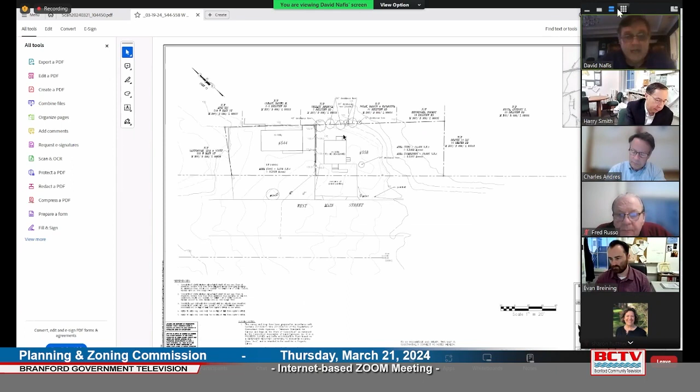Over the past couple weeks, we had some developments, but maybe I can refresh a little on what's going on. We have the site with the existing building here. This building is going to remain and become the auto repair shop. This existing house is going to be razed right here—it's going to be gone, and it's going to become part of what will now be the parking area for the cars required for the site.

And then we're going to have extra parking in this area for what they consider car storage for cars to be sold.

What we've done from last time—there was a comment about drainage—so we've added some more infiltrators in this area. The roof leaders are going to feed down into the infiltration system, with an overflow at the roof leader in this area. This will keep our peak runoff rates within the site boundaries at pre-existing conditions. There is a slight increase of impervious area on site, which is where the infiltration system is.

In addition, the area outside that's still part of the project was not included in that calculation, and what we've done there is actually reduce impervious surface. So we have a net reduction of 2,100 square feet. This was paved pretty much from here all the way across with either gravel or bituminous, and you can see now we've added a lot of grass space in between.

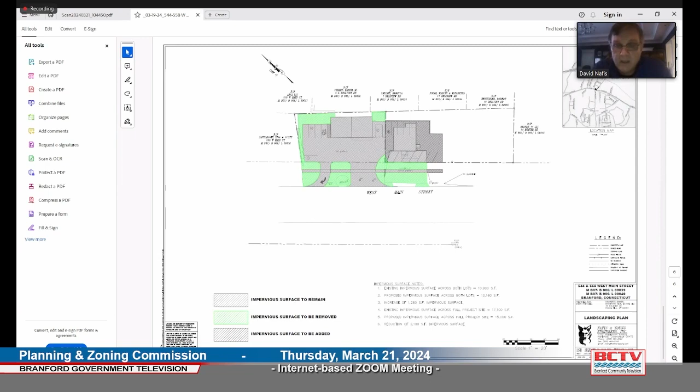Over the last two weeks, we've met with the landscape architect, Mr. Lawrence Appleton, and he basically gave us what he deemed we should do on the site. Let me see if I can pull this up.

So what he's looking for us to do is we've pulled the fence in on this side. There's a screen fence here, and we're removing some asphalt. We're going to mulch the area in the back here—this area will become a mulch bed. These are the existing large trees along the back line.

So what he suggested we do too is pull this fence up to here. We're going to put in a retaining wall, so there'll just be some minor grading to fill in here, but there won't really be grading in the back of this area. So we should be able to preserve all these trees.

We've also added a small swale in this area with these trees, as he suggested, so any sheet runoff in the parking lot will go here, and all these trees in this area will absorb that extra water before it goes downhill to the large wetland down here.

Where we show the silt fence here is basically where the top of the slope is—from here it really starts to drop off. So we're going to try to catch everything here where it's a little flatter, before it has a chance to run off and go down the hill.

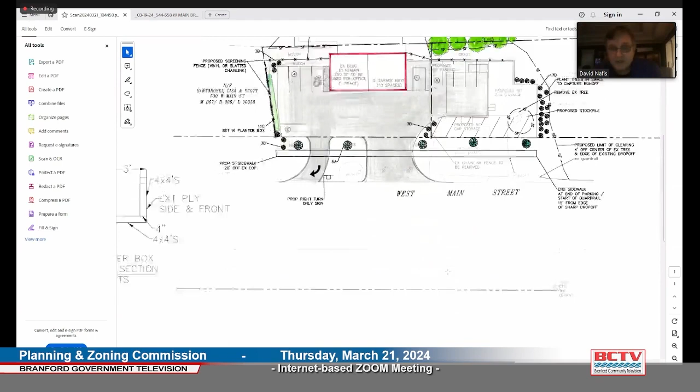You can see we added a couple little trees around the whole site. The type of trees is listed on the bottom of the sheet, and you can go through each one. I'm not necessarily a big tree guy, so I can't give you all the ins and outs of what does what, but I do know the ones over here he said were very good at absorbing water.

And this light green patch over here is a planter box that will be set with a bunch of plantings too, to screen off the area where even though it's a house, it's still in the business zone. Other than that, that's pretty much the changes we've made over the last couple weeks.

Okay, Chair, thank you, Mr. Nafis. Anything else? From our end, that's pretty much it. Okay.

We'll turn this over to Evan. Evan, I think you've been reviewing this application. Do you have comments? Have you had a chance to review these, or where are we? I did not have the opportunity to revise my staff report. Received the plans yesterday. I believe there was also a stormwater report given to the town engineer, so he is yet to make a review or provide any comment. I'd like to continue to the next meeting so I can prepare a response to the submitted plans.

Thank you, Evan. I would like to hear what the commission thinks. We had a discussion at the last meeting about the landscaping plan, so I'd like to see if these measures taken are something they're comfortable with.

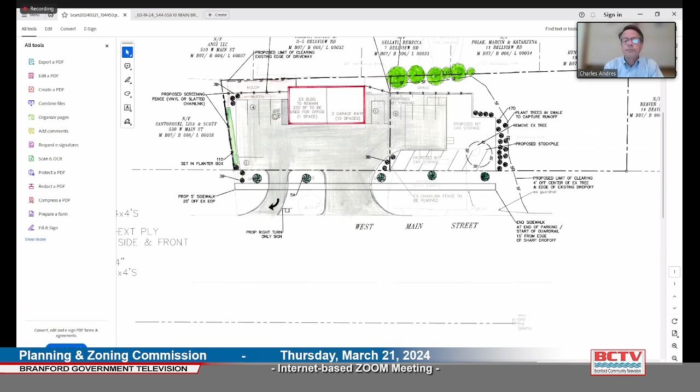Dave Nafis, I could just add one thing. Mr. Appleton actually drew these out. We just added them to our plans. So this was his actual layout. Okay, great. Thank you, Mr. Nafis.

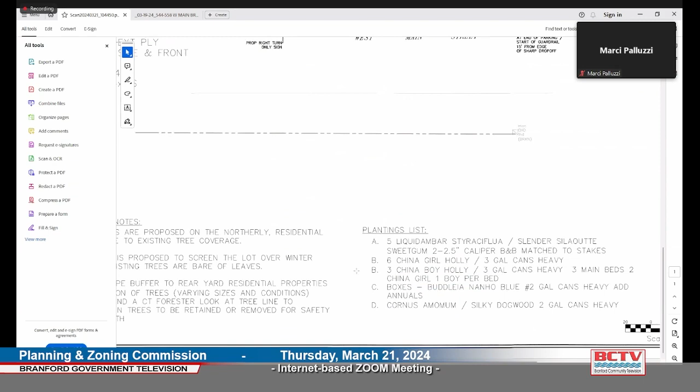Questions, comments from commission members? Hi, could you just zoom in on the plant list again, please? It's Marci. Thank you, it looks much better. Thank you, Marci.

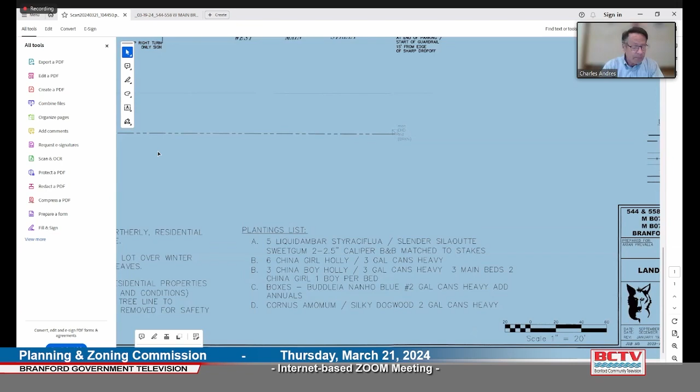Any other comments, Marci? Any other thoughts you'd like to make at this time? Other than my dog barking in the background, no. That looks like he's got some natives in there. He's got some good plants. The dogwoods will do well in the swale, so I trust his years of experience. I'm happy to see that they're protecting the trees with the retaining wall. I think that's much improved.

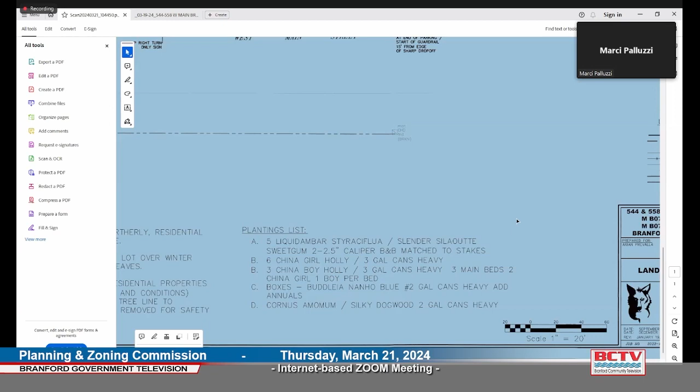Other comments from commission members? Yes, contrary to my flip response, we discussed this previously. I think the scheme has benefited greatly from probably not much effort on the part of the landscape architect, and the overall benefit, I think, will far outweigh any expenditure to provide it. Thank you, Joe.

Other comments from commission members? Sharon Hudner here. I would like to agree with everybody, and I think this just goes to show you how important it is to have a landscape architect look at our plans and make sure that they do have adequate landscaping. So I would like to thank the applicant for moving forward and doing that. Thank you, Sharon.

Other comments from commission members? Fred Russo? I just want to say I think that this plan is significantly better than the one that was previously proposed, and I agree with all the other commissioners who feel that with a little more expertise to the plan, it's going to enhance the property and probably enhance his business. It's going to be more appealing, have better curb appeal. Just seeing what I see here now, I'm happy to see they took all of our advice, which was go back to the drawing table and come back with something better than what you had. I think they've done that. So I'm happy with what I see. Thank you, Fred.

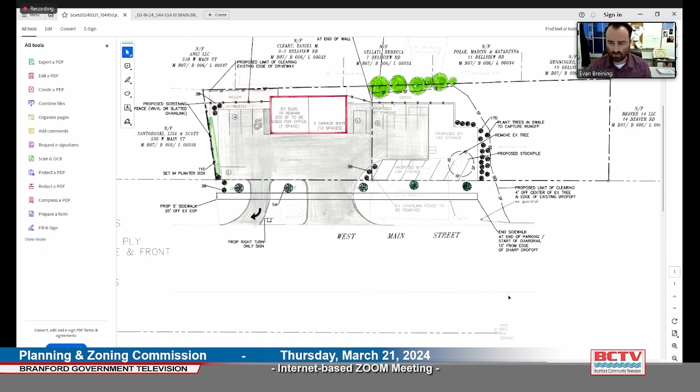Any other questions or comments from any members of commission or staff? Evan, let me ask you, are there other questions you had? I know there were a number of concerns besides the landscaping. Is there anything you wanted to call out? I still have a number of items from my previous staff report. I'll have to skim through them and take a look. I can't think of them off the top of my head, but one thing I didn't see on the grading plan was this proposed swale. Was that on the grading plan, Dave?

I have to take a look... it's gonna be very small, such a small area it may not even show up.

Mr. Appleton asked us just to put a small swale to catch water, and whatever trees we plant along there can absorb a lot of that water before it has a chance to run down the hill into the wetlands. As for the wall height, we've actually reduced it in this area where we've cut the wall, and it's going to get cut here and match. So this section will be a little higher, and as you come around it'll be lower. The total height of the wall is about 2 to 2.5 feet at the maximum, in the back.

Chuck Andres, Chair: Any other questions or comments from commission members before we open it up to the public? Hearing none, let's open it up to the public.

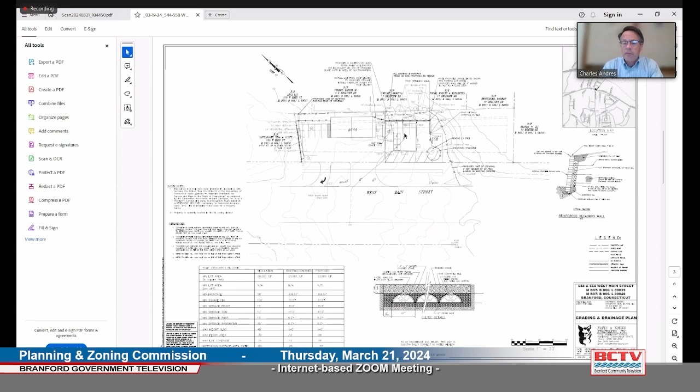Looks like Perry Maresca would like to speak. Mr. Maresca? Whoops, looks like you're muted, Perry. I just asked him to unmute, hopefully. Okay, there you are. Perry Maresca, Economic and Business Development Manager for the town of Branford.

I do think this is a good proposal, especially now that the landscape architect has put in the most recent plans. The fact that they're eliminating some of the paved area, giving more of a buffer from Route 1 into the facility, is great. I think it's a huge improvement to what the property looks like right now. I congratulate the owners for making this effort, and hope that planning and zoning can find a way to approve this.

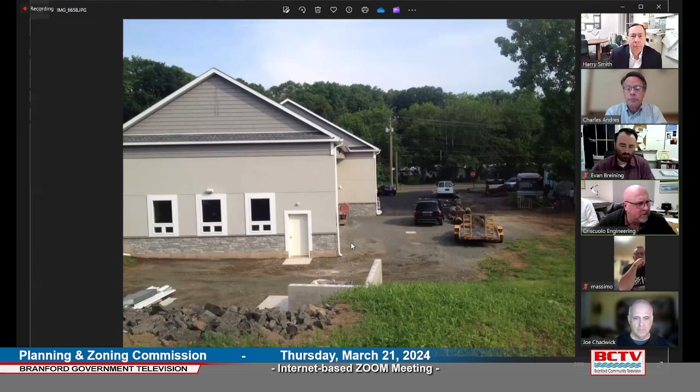This is what the building looked like previously. You can see this is the J&E Auto Body currently, but you could see some of there was a junk bus there. There's J&E Auto Body, and this is the welding shop from the other side.

They have recently cleaned the building up and reskinned it basically, replacing doors and windows. You can see it's a much nicer looking building, very similar to the auto body shop next door, with the same stucco feature and stone coursing, and some shingles in the gable ends.

We did go to the town center review. They were very happy about the appearance of the building matching the other building. So why we're here is that they want to use the building

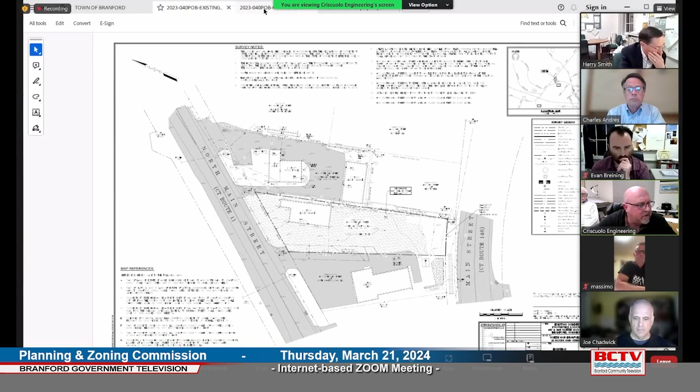as auxiliary space for the auto body shop next door. So we were asked to provide a possible parking and lighting plan. We did have a lighting plan done that was sent in. We show more than enough parking spaces here.

Basically, the parking spaces would be more or less stacking spaces for cars that are either in process of being fixed or to be fixed.

We also have a landscaping plan that Mr. Appleton has helped us prepare. We are providing building plantings along the side here. There is an overhead door in the front, so we're trying to keep this space clear here.

Although historically the old property had basically crushed stone right out to the curb line, that's obviously DOT property within the right of way. So we're taking back all the gravel and stone that's out in the right of way, and putting in topsoil and grass.

We're providing a landscape buffer area along the residential district, which comes through at an odd shape here. And we're adding some street trees along the front, and a street tree in the back.

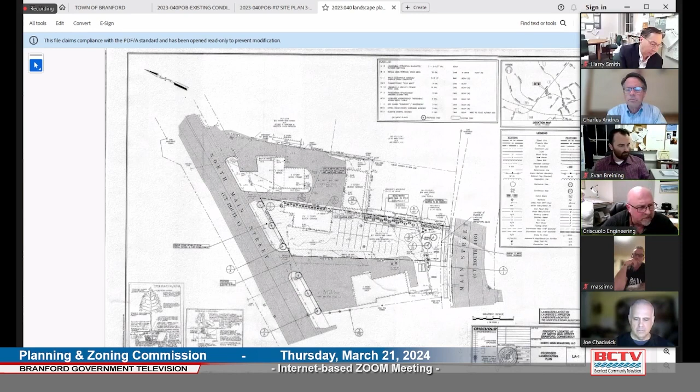We're trying to get them to be able to use that building. But we are talking about adding on to the existing shop, and at that point we will have to merge the lots because of the setback requirements with that lot line. So we'll need to get rid of that lot line, and the next phase would be merging the lots. Adding on at that point, we'll most likely be looking at paving some, if not most, of this. But right now it's going to stay crushed stone.

Thank you, Mr. Preddy. Mr. Immuno is also on here if you have any additional questions that I can't answer.

Chuck: Thank you, Mr. Preddy. Evan, you prepared the staff report for this one? Evan: I did. I think Mr. Preddy hit a lot of the points that were in my staff report already. They're establishing motor vehicle service at a site between two adjacent lots that they previously own and operate their business out of - 13 North Main Street and 23 North Main Street.

It came to our attention late last week that some work had been done at the site. We received some calls from neighbors and other departments with the town of Branford that some paving had been done and a retaining wall had been built.

The applicant's engineer supplied us with a landscaping plan and a new site plan yesterday, so I had recommended in my staff report that we continue to the next meeting. I would still recommend that - I'd just like a chance to look everything over and prepare some conditions of approval, hopefully for our next meeting.

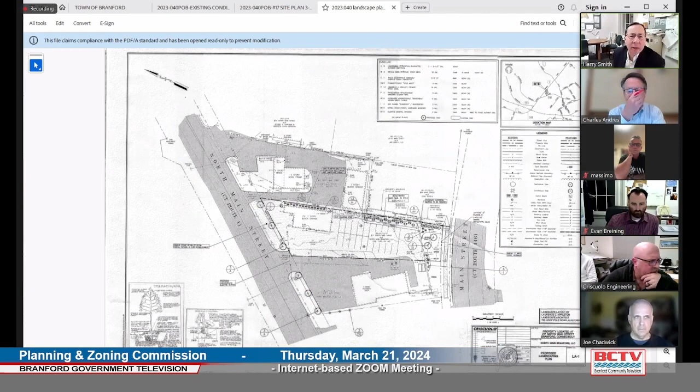Jim Preddy: the street trees, is that what you're talking about? Yeah, the street trees, and there's some shrubs too. So we are proposing some street trees right up against the property line, and then the landscaping on the north side will wrap around the front somewhat.

But we're trying to keep this area open because they'll have to get in and out. The other thing would be to provide access across to the other site without having to go onto Route 1. They're losing a curb cut here, so.

Yeah, I understand, we'll have to. You're at the whim of DOT when you put them in. Apparently, that's my understanding anyway, they can take them down if they need to. Not that they're probably going to, but do you get permission to put them in there? I would think you do. It'll have to get reviewed by them at some point. All right, well, we can look at that before the next meeting.

Jim, how tall is the retaining wall in the back? It is nowhere higher than 3 feet. After we heard about it, I actually sent my survey crew out there and shot it, and it's 2.8 feet here, 2.8 feet in the middle, and it goes down to just over 16 inches at the end. So it's nowhere higher than 3 feet.

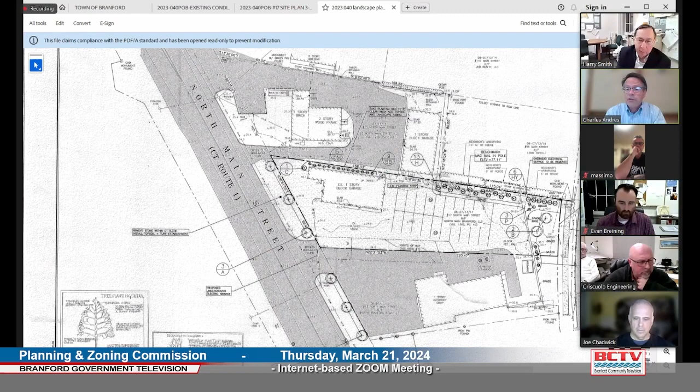Thanks. Any other comments from commission members or staff before we open up to the public? Hearing none, then let's open up the public. Any member of the public wish to comment?

Looks like I see one raised hand. Yeah, looks like somebody's calling in. Could you please unmute yourself and state your name? Yes, we can hear you.

Good evening, gentlemen. My name is Maureen Gherkin, and I come from 43 Wilford Avenue, Branford, and my husband and I own 25 North Main Street. I received a letter that Mr. Amuno wanted a special exception for number 17, which he bought in 2022. He bought 13 North Main Street in 2012 and 23 North Main Street in 2017. I'm asking the commission to look with pause and concern regarding the entire project.

I understand that it does look better in certain areas, but I wish that the whole entire site plan was one plan so that it's not chopped up. I have concerns with driveways. I know the town did a study years ago about North Main Street and how driveways and the angles of the driveways were recommended to be if special exceptions were given to certain site plans.

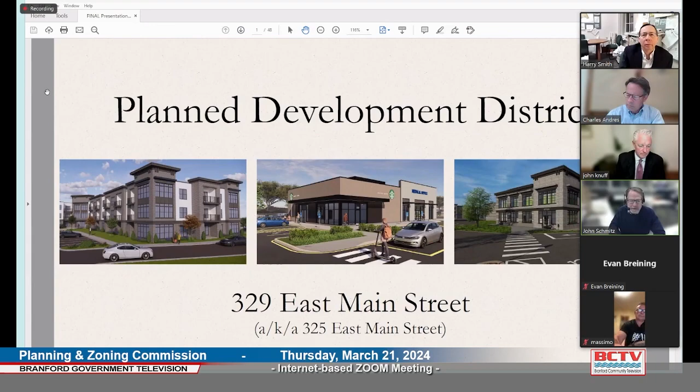Hi, thanks, John. My name is John Schmitz. I'm a civil engineer and project manager with BL Companies, 355 Research Parkway, Meriden, Connecticut. I'm going to give you a brief overview of the site plan in general. I think we can go to the next slide.

This is a copy of Plan ALT-1, the survey of existing conditions. Just to orient you with the existing plan, Route 1, East Main Street, is along the left side of the plan, running up and down from top to bottom. Interstate 95, exit 55 on and off ramp, is located at the top of the plan. The large rectangular building centrally located is the existing vacant cinema building, and the smaller rectangular building on the left-hand corner is the existing Walgreens.

There are currently 2 means of access to the site off of East Main Street. One is a right-turn-only driveway into the site at the lower left-hand corner. Then we have a full signalized intersection for our main driveway, centrally located in the middle of the site. That is a 4-way intersection. Zane Cycles is located directly across the street from us, so they share the same traffic signal as we do.

There's circulation throughout the site today. The site is approximately 63% impervious. There's roughly 622 parking spaces on site today. Obviously, the vast majority of that is unused since the cinema is vacant. It has been maintained, though, throughout, as has all the stormwater systems. With that said, there is a significant wetland area on the rear of the site, on the far right-hand side of the page.

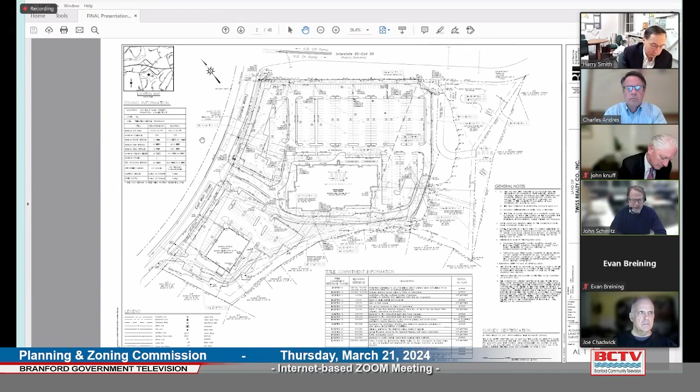I'll note along the bottom, if we go to the next slide, we could jump to the site plan. Sure, this is a rendering of the site plan that was submitted with a planning and zoning application in February. You'll note the large rectangular building.

The cinema is still there, same size and location - obviously that's not moving. But we've added two new buildings: one is a T-shaped residential building positioned parallel with the exit ramps.

And then we have the smaller, roughly 5,000 square foot combination coffee shop and medical office building with drive-through fronting on East Main Street. We are maintaining our existing site access driveways, so we'll keep all the same traffic coming in and out of the main signalized driveway as is today, and then circulation throughout the site.

There are several parking areas to access both the commercial and residential lots. We've provided amenity spaces to the rear of the residential building, right there. And you'll notice there's a dark gray band right there, where the pointer is.

That was installed as part of not only access for our stormwater system, but also for fire purposes, for emergency access, so that fire trucks could have access to that end of the building.

You'll also note that down at the lower end of the building, right there, we have a proposed dog park and an amenity space just to the right, just to the right of the existing cinema. That was where it was originally proposed.

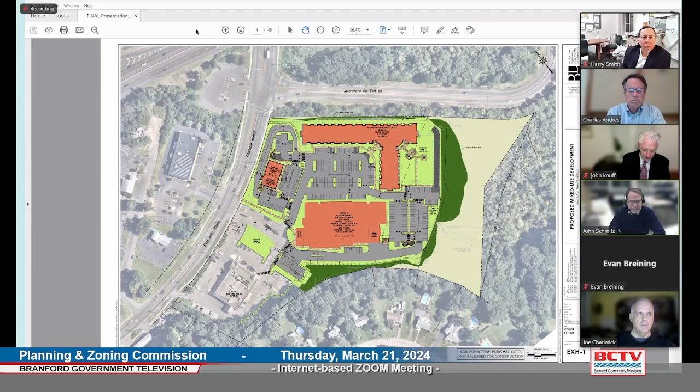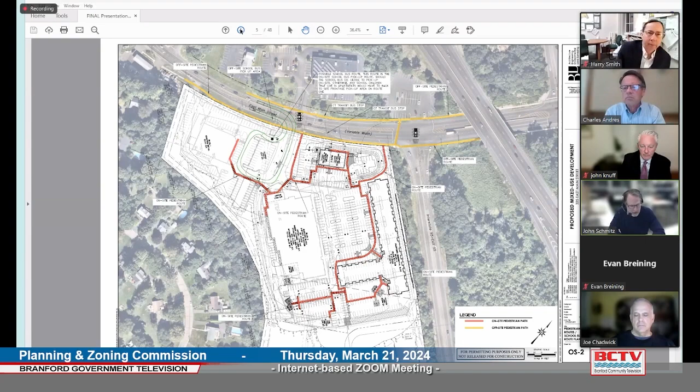In addition to that, I just wanted to mention that we would again be revising some of our landscape plans, stormwater, lighting. We've made some headway in the last couple of days to take as much as we could to make some revisions, but we've still got some work ahead of us as far as the detailed design goes, and we will be addressing that in the future with a revised submission. With that, that's a high-level overview of the site in general. I'm going to pass things off to Sal, who's going to give you an overview of the residential building.

Hello, my name is Sal Talamo from the Sullivan Architectural Group.

The residential portion of the project consists of a three-story multifamily wood frame building. The building offers 116 units with 176 parking spaces at 1.5 spaces per unit, provided in several lots. With our architectural experience for this type of project development, providing 1.5 parking spaces is appropriate and necessary regarding the suburban setting of the project's location.

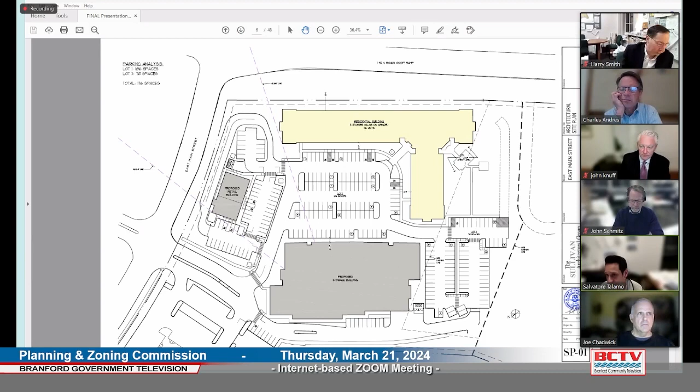With the recent reduction in parking, the previously proposed multiple exterior spaces will now be consolidated into one larger area, offering an opportunity for more enhanced exterior space benefiting the tenants. This was what was previously discussed. The building is laid out in a T-shaped configuration with a centralized corridor with units on each side.

Can we go to the next slide? So that was the amenity space there. So here, this is the first floor where we can see the corridor and the units. The ground level, which we see here, features an amenity space that consists of a club room, fitness center, business center, and the exterior terrace at grade as shown.

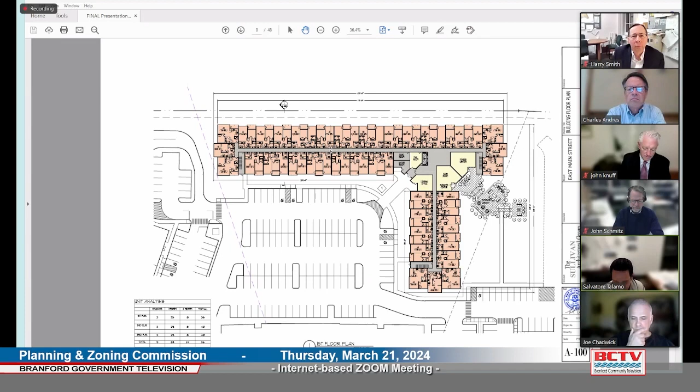The next slide, which shows the typical floor plan, has stairwells at each end of the wing with direct access to the exterior, with an elevator lobby at the intersection of each wing. The next slide shows a corner perspective. The intent of the massing of the building is for the traditional New England mill village. The aesthetic features a contemporary look with traditional materials.

The building geometry consists of flat roofs broken up with variations in the cornice line, providing the building's massing with proportion and scale. The darker masonry with lighter clapboard siding provides a contrast to the massing.

Various arrangements of double hung fenestration further articulate the building's geometry. Balconies with metal railings break up the facade, providing an added layer of scale and depth, as well as providing the tenants with their own private exterior space.

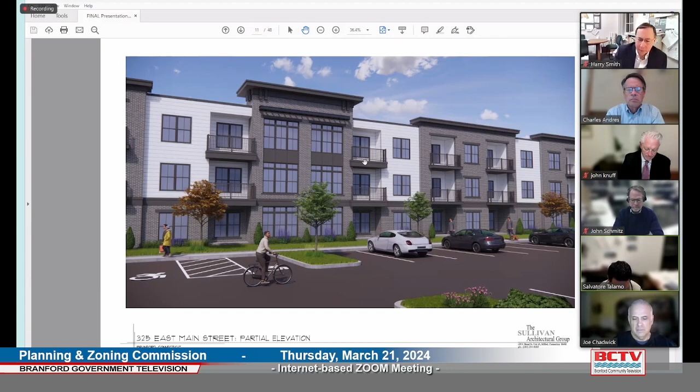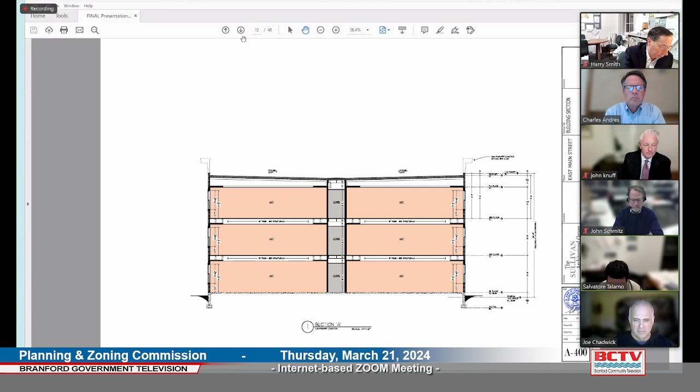The next slide shows a section with the building's height at 3 stories. We are below the required 40-foot max, and there is no need for a variance as previously mentioned. The height to the tallest parapet is 39 feet 8 inches, and to the lowest parapet it's 36 feet. This difference offers a variety in scale and proportion, driving the building's character.

The next slide shows the other sections as discussed, the higher on the left and the lower on the right.

To conclude the last slide, the mill building's massing is clad in traditional materials with contemporary contrast and color, providing the community with both a modern and timeless aesthetic. The extent of the variation in the building's geometry offers its tenants a variety in articulation, as well as offering the town a revitalization of the property's past.

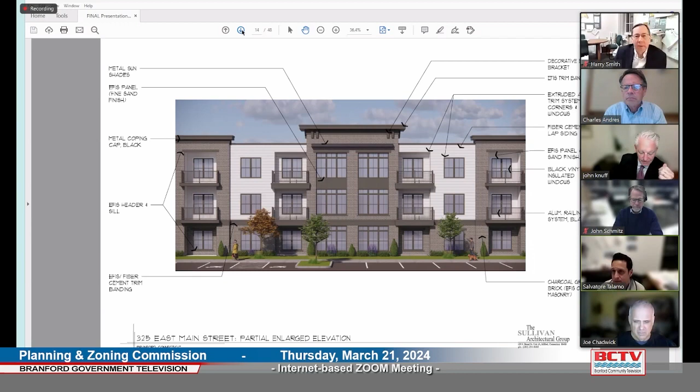So that pretty much sums up the residential architecture portion of the project.

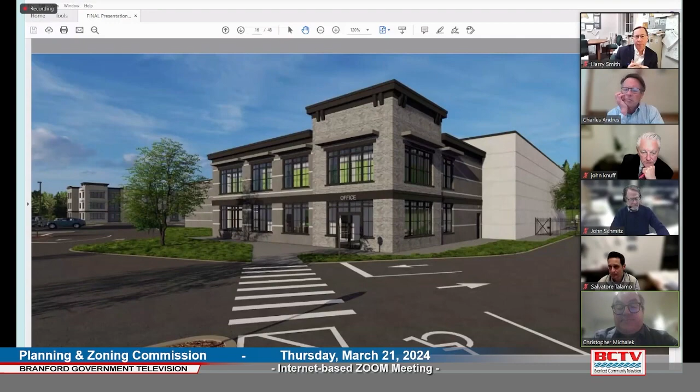And I think we can go to the next sheet, talk about operations a little bit. So on the bottom middle of the sheet is the existing now two-story building. The office is on the left-hand side facing East Main. And all the way on the right-hand side, we're going to have a completely interior loading area.

So a customer would drive back to the back of the building, using their access code to move through the gate. That same access code would be required to open the loading area through a couple of overhead doors. Then those doors would close, and the customer would unload their stuff and transport them to their rented unit.

To touch on security a little more, this building is about 35 cameras inside and out. It's 24-hour monitored, with an on-site manager and assistant manager during normal business hours, 9 to 5. Access hours to the facility are probably 7 a.m. to 9 or 10 p.m. It probably won't be a 24-hour facility. The main operators, although we don't have one on board yet, most of the big operators like Extra Space, Life Storage, CubeSmart and the like are not 24-hour facilities, and they're really meant for residential storage uses. With that, I think that's a nice nutshell of the storage building.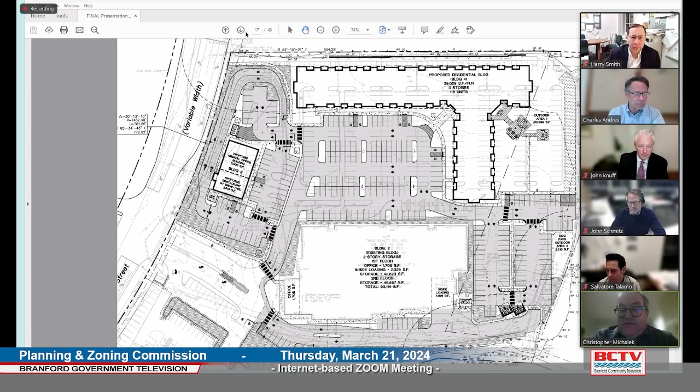Harry Smith, Town Planner. I hope I've made Mr. Scott a co-host. I'm not sure that I picked that up right. Harry, I think he's all the way down at the bottom of the list. No, I found him. Okay, should be all set. Thank you. There you go. I was able to unmute. And let's see if this video, there's the video. Hi, my name is Tom Scott.

I'm a project architect from Scott Griffin Architects for the retail building. This is obviously the smallest building on the site at about 5,300 square feet. There are 2 tenants planned in the building: about 3,000 square feet for the medical office use, the walk-in urgent care type use, and then the coffee use, which would be, as we've depicted, a Starbucks.

The Starbucks would also have a drive-through pickup window on the Route 1 side of the building. The Starbucks has a brick veneer. It's a little hard to see in the rendering, but similar to the other buildings on the site, we tried to design this building so that it had a complementary style to the buildings that are adjacent, the residential and storage buildings.

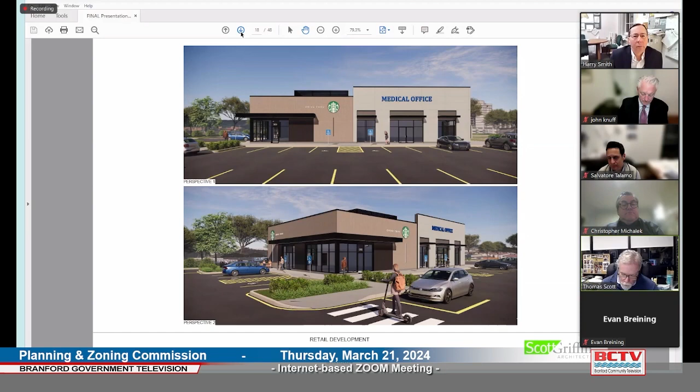We've incorporated a black metal canopy element about 3 foot 6 deep that surrounds the building on 2 sides, which basically defines the storefront windows. It wraps the building around to this side as well. On this side of the building, you can see there's an outdoor dining area to the left, with tables, chairs, umbrellas, and site amenities. There's also a similar canopy, as you can see in the lower rendering, that wraps around the pickup window on the back side of the building.

That particular element where it bumps out from the building is wrapped with an articulated, rough sawn wood material. That wood material is repeated again below the canopy where the storefront is in several locations, so there's a recurring theme of materials around the building. There's Starbucks branded signage on the building as well as on the complimentary order boards and menu boards.

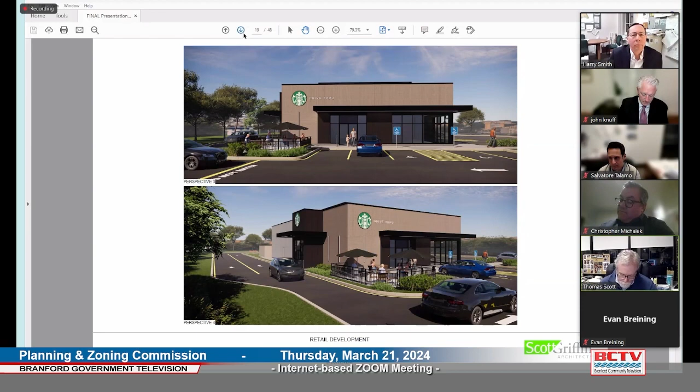The building to the right is the medical office, slightly taller than the Starbucks, again to help conceal the rooftop equipment. The panel facade will be Nichiha, a cement-based panel material, so it'll be a very systematic and organized panel material. We've introduced similar eyebrow canopies over the window elements, accentuating the window locations with a wood material in the recess just above the canopy, repeating some of the similar elements not only around this building but from adjacent buildings on the site. The windows are black aluminum to complement the adjacent tenant setback.

They're set back slightly in a recess that allows the accent band above. The horizontal shade canopies accentuate the window locations. The building is a simple modern design with ample space for future tenant signage. We don't know who the tenant is going to be, but we've allowed for plenty of space for signage. The side and rear of the space will have matching EIFS panels to help control costs, but defined with reveal elements similar to the panels out in front of the building.

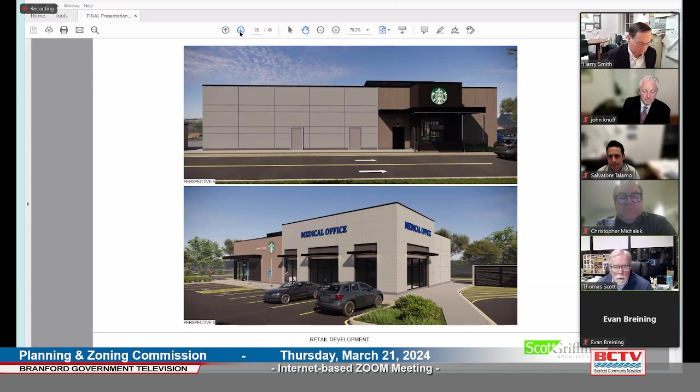All utilities will be screened by landscaping and fenced enclosures, and the trash enclosure will be a solid masonry screening element with a lockable metal gate that will enclose the trash and recycling receptacles. That's pretty much it. It's a pretty simple building, designed to be complementary to the adjacent buildings on the site. We pass on to whoever's doing the next traffic impact study.

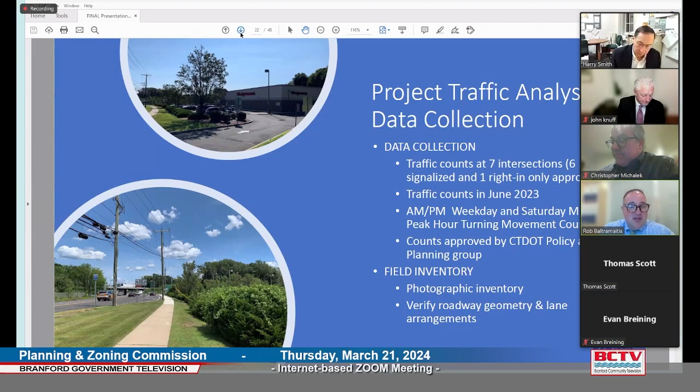The other intersections in our study, moving north of the site: first, the signalized 4-way intersection of Route 1 at the I-95 northbound interchange, opposite the commuter lot—that's interchange number 55. Continuing north, the signalized T intersection of Route 1 at the I-95 southbound interchange. And finally, further north, the signalized T intersection of Route 1 at North Branford Road, which is State Route 139. Once we collect all these volumes, roadway data, and traffic control information, we can start to prepare our existing condition model.

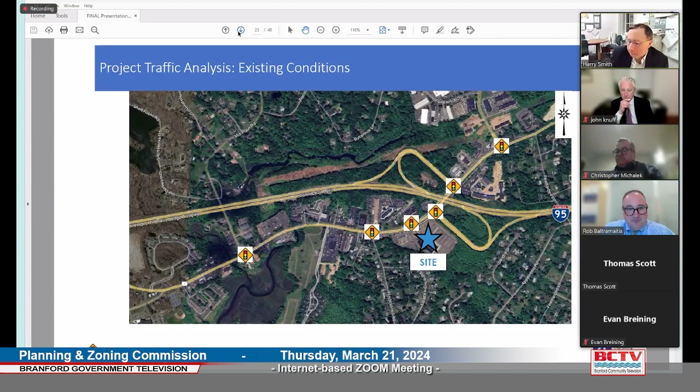The study, again, was dated December of 2023. We want to know in 2 years, in December of 2025, what are the existing conditions? So we have to take our existing conditions and apply an annual growth rate. And this area, according to the DOT, it's 0.8% annually. So we make that increase.

And also in the no build traffic, we want to include trips associated with other developments in the area that are approved but not yet constructed. And I believe Attorney Knuff mentioned the Metro Star project on the other side of the highway to us. When we did our counts in late June of 2023, that project had begun but wasn't yet completed. So in our no build condition, we add traffic that represents the full completion of the Metro Star project.

And so that is our no build model scenario. And finally, we need to model the build condition, which does include our new site trips. Next slide, please.

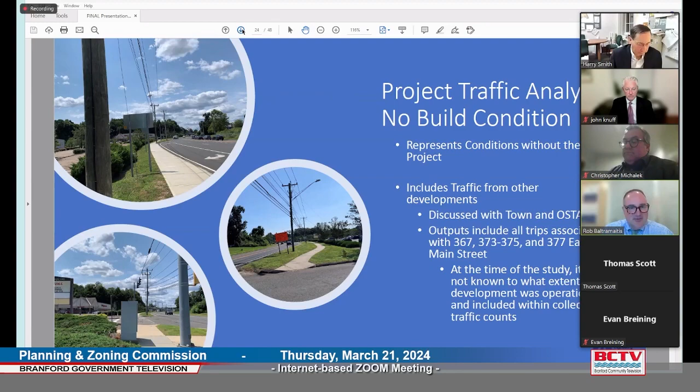Okay, and under our build condition, we're going to be applying the traffic. As I mentioned, the site is served by our primary driveway, which we call driveway number 1, a signalized driveway to Route 1, and also by a second driveway, a right turn in only, on the opposite side or south side of the Walgreens site. Those new site trips get superimposed onto those no build trips to represent the build condition.

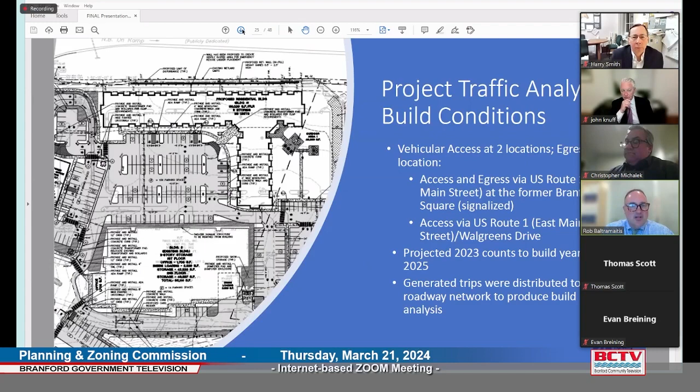So if we could go to the next slide, I want to talk about how we estimate new site traffic. Estimates for new site traffic come from a publication called the Trip Generation Manual, published by ITE, the Institute of Transportation Engineers. It's currently in its 11th edition. And what that manual really is, is a compilation of studies that compares some measurable aspect of a land development project with the number of trips it generates.

So for example, for a gas station, you might estimate the trips based on the number of gas pumps. For a hotel, it may be the number of guest rooms. For our case, for the retail component, which is the coffee shop, for the self-storage component and office uses, those trip estimates are based on the square footage. And for residential, it's based on the number of dwelling units.

Like I said, the manual is in its 11th edition. It has grown tremendously in the 30 years I've been using it, and it gets very specific for the uses. As an example, the residential component is not just residential dwellings, it's actually specific to this type of project, entitled multifamily housing mid-rise. The definition of that is: mid-rise multifamily housing, including apartments, townhouses, condominiums, located within the same building with at least 3 other dwellings, that have between 3 and 10 floors. So again, the manual can be very, very specific, and it is for each of our 4 land uses in this case.

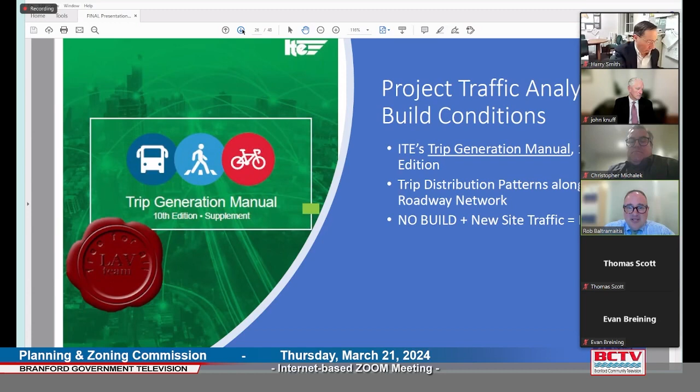So if I could have the next slide, please. All right, this is a table that summarizes the trip generation characteristics of our site. You can see each of the 4 different components, the rates from ITE trip generation, and the totals.

One thing I will mention is that not all of our new site traffic is new to the roadway system. It's all new to the driveway, but when you start looking at the adjacent roadway network, not all of it is new. And ITE and DOT methodologies allow for a pass-by credit for some retail uses, such as the coffee shop.

So when I'm explaining pass-by credit to people, I like to use the example of a gas station. If we're home and we realize we need gas in our car, we're probably not running out to get gasoline right then. We're going to do it the next morning when we're out on the way to another destination. And that is the perfect example of pass-by traffic.

So what ITE allows for coffee shops is a 50% pass-by credit for the site-generated traffic associated with coffee shops. So at the end of the day, our project is anticipated to generate 155 new trips during the morning peak period, 118 in the afternoon peak period, and 165 new trips during the Saturday midday peak period.

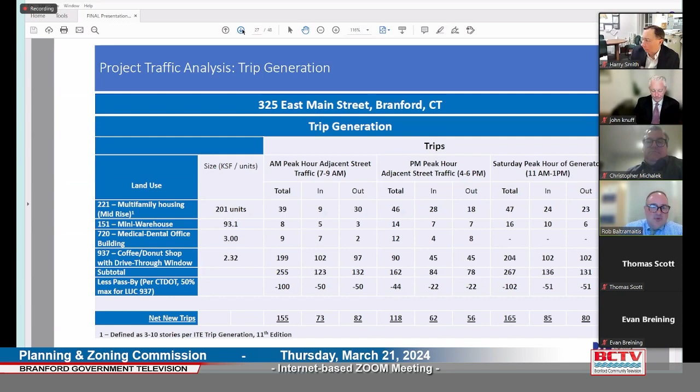So this is where I like to break things down a little bit. If we take that worst case of 165 trips in an hour, I think to most people that sounds like a lot. Now, traffic does not arrive uniformly, it arrives randomly. But if it did arrive uniformly, 165 trips is less than 3 new trips in a minute. So when you think about that, taking the site driveway for example, there's 1,500 cars that are processed through Route 1 at our site driveway. If we add 3 new cars in a minute, I don't think you could notice the difference, and I couldn't notice the difference. So again, I just like to take these ITE numbers and really break them down to real world.

The next slide, please.

What this slide is showing us is, while the theater building is of course vacant, I think it's worthwhile to compare what the site could generate tomorrow if an operator came in and took over that theater for its original use. Based on ITE trip data, with the exception of the morning peak hour, because theaters wouldn't generate much traffic in the morning, what we find is for the PM peak hour and the Saturday midday, our project actually generates much less traffic than that theater would in operation - almost 200 cars less in the afternoon peak period, and about 60 cars less in the Saturday peak period. So the new site trips get applied to that no build condition, superimposed based on travel patterns in the area to develop our build scenario.

So now we have our 3 models: our existing, our no build, and our build. The next thing we need to do is analyze those models.

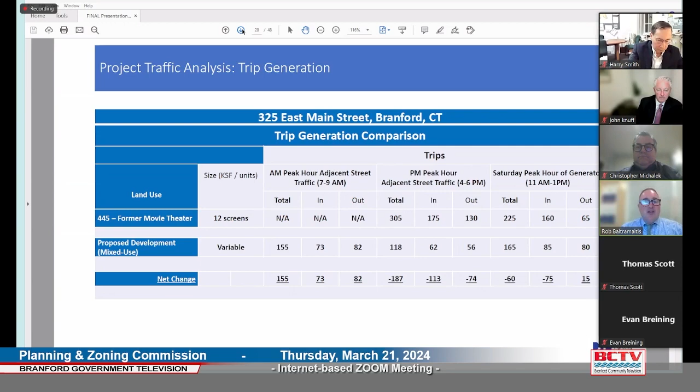Next slide, please. We analyze the models using software entitled Synchro, made by Trafficware. It is the most widely used and accepted traffic modeling software in our industry, based on the methodology of the Highway Capacity Manual published by the Transportation Research Board. At the end of the day, for each intersection, for each study period, and for each model scenario, the models are calculating the average vehicle delay - how much delay is that driver experiencing. And then the delay is tied to the measure that defines the operation of the intersections, and that's a level of service.

As drivers, we've all felt this - when you arrive at a traffic signal, did you get processed through in a few seconds, or did it take you 2 cycles and 5 minutes to get through? So for each range of delay, level of service is assigned a letter grade. You can see the colored chart - green being very good operation based on that average delay, and F being a failing operation or excessive delay. So the next slide.

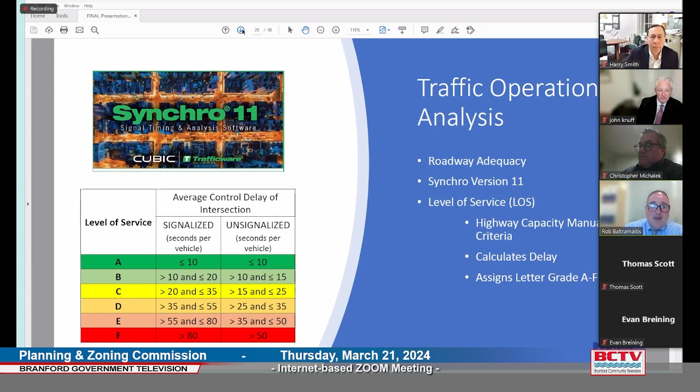What you're looking at here is the resultant overall level of services for the study intersections for the no build and build conditions for the AM, PM, and Saturday peak periods. I do want to keep this high level overview. We could obviously get into each intersection and each overall level of service, and in fact go a step further and talk about level of services for each of the approaches. But keeping it high level, what should jump out at you are the colors - you're seeing a lot of greens and some yellows. What that is suggesting is that what we have out here, and what we'll continue to have out here, are very good and good levels of service, even with the new site traffic. And that really is the conclusion of the traffic impact study.

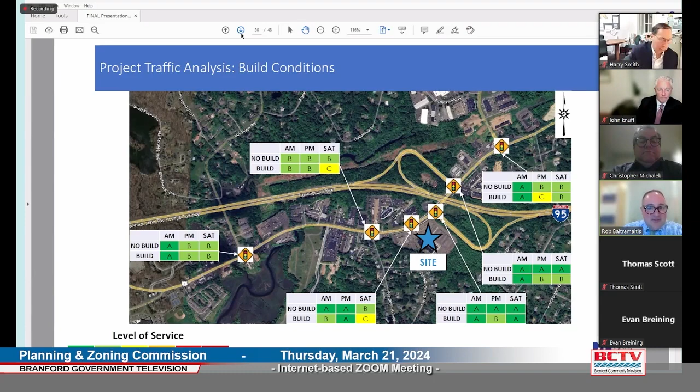As far as mitigation, next slide, please.

The mitigation is really to be on site. There's two suggestions. There's two ingress lanes into the site. The leftmost lane, we're looking to convert to an exclusive left turn lane to better serve and improve circulation to get to the mixed use development. And in conjunction with that, we're also looking to shorten the existing raised median island within that site driveway to facilitate that left turn into the mixed use portion of the site.

This project, and I should say the site, Branford Square, presently has a major traffic generator certificate from OSTA, the Office of State Traffic Administration. We have to go to them for a revision with this project, so that is another level of review by traffic professionals this project will have.

And then finally, as mentioned by Attorney Knuff, the commission has SLR as a peer reviewer to the traffic impact study. We did just see their peer review letter of March 18th. From our preliminary review of it, we feel that we will be able to discuss with SLR and respond satisfactorily to address all of their comments. We'll be doing that over the next month. And that concludes my presentation.

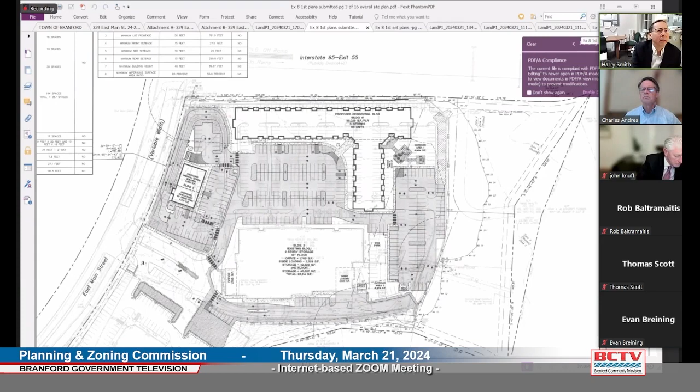there is a proposal to divide the property as part of this application set into 4 pieces. There would be one property here for Walgreens, essentially, another parcel for the pad site in front, and then the residential would have full frontage. So it wouldn't be an interior lot, but would have a dog leg effectively.

This would be for the residential building, and the remainder of the property in the middle here for the self-storage facility. If you look at the net acreage, which I believe is just under 5 acres, and the 116 units, that gives you a density of about 23.5 dwelling units an acre, which is over the incentive housing zone cap of 20.

Whether that's problematic or not, I'm not too concerned, frankly, personally, as staff, about the density level, with the exception of possibly setting precedent, or as that in combination with commercial development here presented a challenge, I think, to the development team to come up with a plan. I think it's getting even more improved as time goes on here, but there's a lot of constraints in coming up with a site and a layout that works as well as possible.

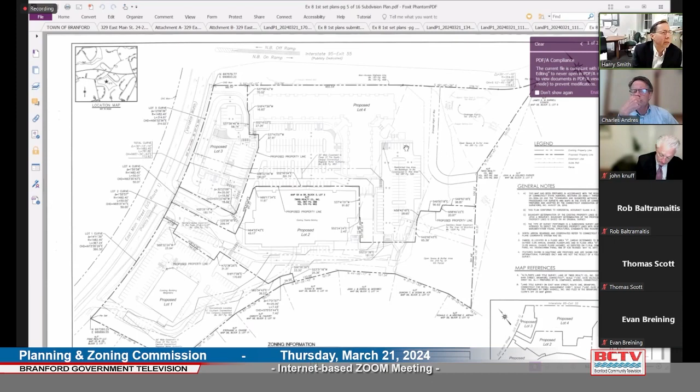So there are some proposed things to consider, going back to the landscaping plan here, which, as you can see, is pretty busy.

Fire access, I want to look at the arborvitae here. I think I mentioned that. There is moving sort of this up here.

There are the backs of residential properties that front on Meadow Circle Drive here. This is all wetland areas, so I don't know where the residential zone starts, but I think it's not any closer than the property line of the applicant here, which is well back from the developed area of the site. So effectively, there's a residential district buffer here.

I think at least doing a rough outline of where the tree line is, and the fact that it's all wooded, that information should be presented. I don't think we need to get into what kind of trees are in that area.

But there is some vegetation along here that's not really indicated. I believe there were some plantings put in around '97, when the movie theater was built, to enhance the buffer here. But I think that requirement for the residential district buffer needs to be addressed, either through the existing vegetation or some combination of further enhancements if needed.

There is a short retaining wall up here, I think no taller than 2.5 to 3 feet at the very maximum. There's a wooded area here along the ramp, but seasonally it is visible. I don't know what the treatment of that is. I don't believe I saw anything on the plans, unless I missed it.

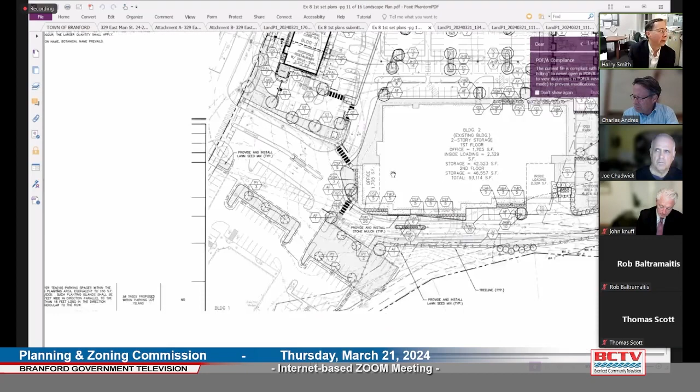There is no information at this point other than the '97 landscape plan for the Walgreens portion of the property. I think the lighting that's there now is going to be retained.

And the landscaping should be shown on the plans, because that's part of the development, even if it's not changing much. It's possible some things would need to be upgraded to comply with existing regulations.

Lighting itself, I won't talk much about, because that might be in the process of being modified. But the proposed pole height of about just a little over 23 feet, I think, really gives it a commercial feel. That's the typical height for commercial parking lot fixtures.

I think dropping that down would go a long way towards enhancing the residential feel of this part of the development. By dropping it down, I would recommend around 15 feet. That requires more poles, true, but I think it would keep that ceiling lower.

It would reduce the potential for light trespass into the windows of some of the residential units facing here and here. This building's views are going to be a little tough. The upper floor might be nicer, but you've got the highway on this side, then a parking lot, and this repurposed building's going to be a self-storage facility that way.

And the real views of some vegetation are going to be really limited to this side of the building, I would imagine. So things that can be done to make it less commercial in appearance would be very beneficial. That's certainly one of them.

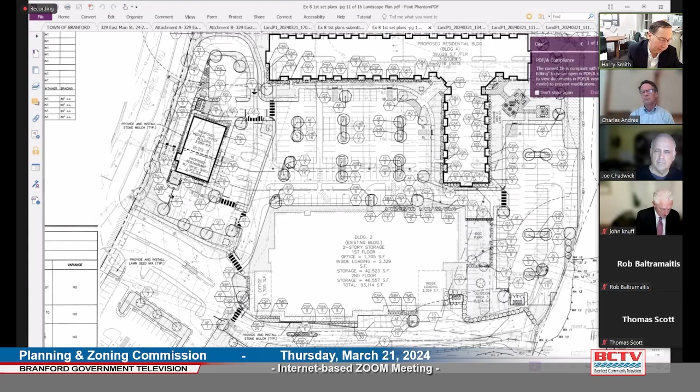In terms of comments we received back, the fire department just requested that there be a 20-foot level grade area on the I-95 ramp side of the building. As mentioned in the presentation, this is an area where a fire truck needs gravel or structural soil or something to support it, so it can get closer to the back of the building for deployment if needed.

We received no comments from East Shore Health District other than to note that the coffee shop is a restaurant and would need to be approved by them. And I've yet to get comments from the police department.

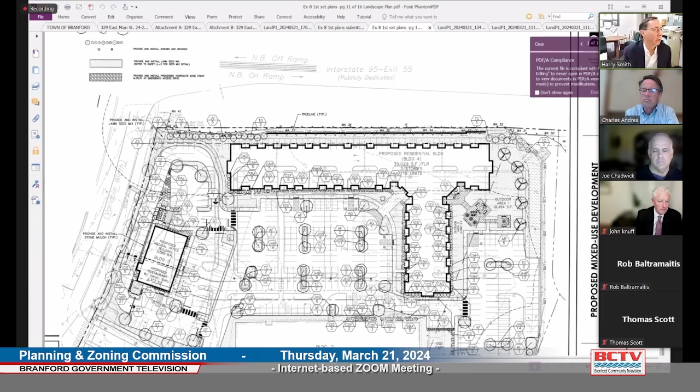One other comment I just wanted to note, this is part of the access management district. So it's not really on this sheet of the plan, but let's see if I can show it. No, that cuts off too. But you guys can see right down here, this I believe is part of the property of Branford Auto Center that extends down to the intersection of East Main Street and Windmill Road.

Similar to the development that occurred on the other side of I-95 by MetroStar, just having some kind of easement in place for potential access here through these two properties, should that site ever be redeveloped, is something I bring up to the commission's attention as staff, since it's part of the access management district requirements to look at and put in place as it makes sense.

There is one large sign here, I believe, somewhere between the two parts of the access drive. How that's going to be handled with the subdivision is unclear.

The whole subdivision itself brings up some questions. First off, I don't know if it's a resub or not. There was a subdivision approved by the commission in concert with the cinema approval that sliced out a parcel for Walgreens. I'm not sure if that was ever filed with the town clerk to make it effective or not.

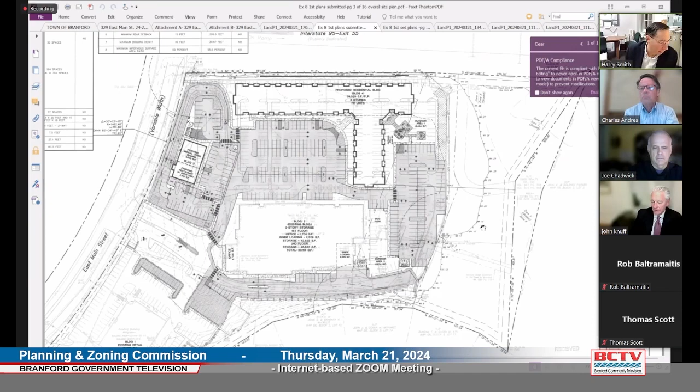Understood. But that brings up a question of timing. I understand you'd need a large part of next week to complete the process of coming up with the fully revised plans. That's frankly my review period, because we try to get comments out to the commission Friday before the meeting, which I barely made last week, which is why you get comments till Monday morning. So I don't know, we can continue it to the next meeting if that's your choice, but I want to leave myself enough time, and leave you time to see my comments for the next round too. We can play that out, but I just wanted to note it.

Candidly, I thought of that myself, but let me talk to the team tomorrow morning. I don't want to waste the commission's time, but if we think we can make significant headway, it might make sense to go forward at the next meeting. It's a little too soon to tell.

That's fine. I'm going to stop there in the interest of time, and I think I've touched everything I wanted to touch. We do have the peer review consultant here, and if the Chairman is okay with that, I'll turn it over to him to go through the peer review comments.

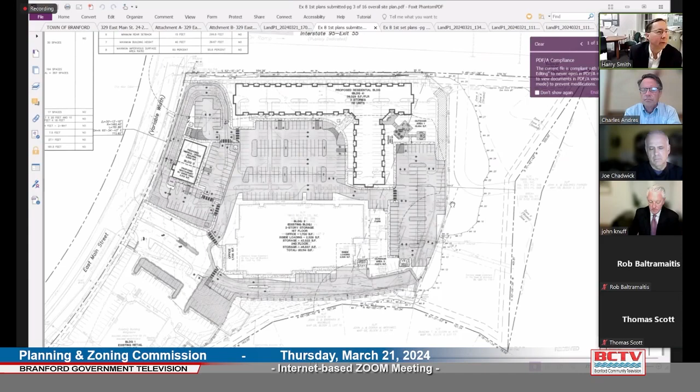Chuck Andres here. Yes, certainly, we're happy to hear from our peer review consultant.

Good evening everyone, excuse me one second, my voice is a little scratchy. Sorry, I should have introduced you, Fred Russo, yes, of SLR. Fred Russo from SLR, office located in New Haven.

The applicant gave a very thorough presentation of what's included in a traffic study, the methodologies, and the ultimate goal of a traffic study, which is to determine if the proposed project has an impact on traffic operating conditions on the roadway network. I appreciate that introduction he gave. I have a couple of comments, I'm not going to go through each one. Some of the items have already been somewhat addressed, but I'll go over some of the more important ones for the board.

Traffic impact studies not only look at level of service—and there was a slide shown that the overall level of service was still in a good range during peak hour operating conditions—but traffic impact studies also take a look at queue, to see if the turn lanes in the area are impacted by the project.

In other words, if there's a turn lane with an existing queue or a no-build queue, and the project causes that lane to exceed its capacity or exacerbate it further, that could be a queue impact. So one of our comments is for Table 7, where they present queuing information: they should include the storage length in feet of all exclusive turn lanes analyzed in the study area, and also look at whether the proposed project would impact the storage capacity.

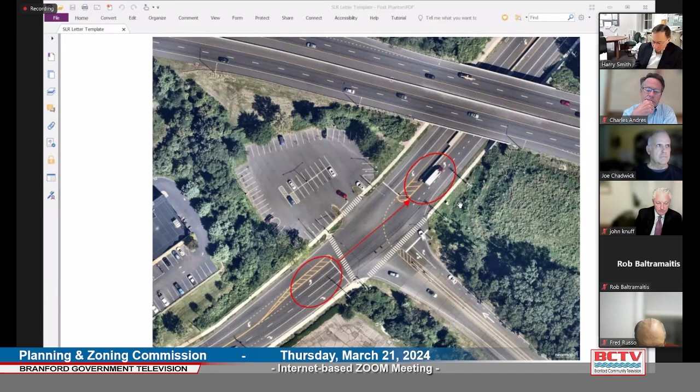So I encourage the applicant to consider what changes they might propose, and maybe have a discussion with Connecticut DOT, then follow up with the town about how this may be improved. It's an existing problem right now, but I'm also concerned with what might happen here in the future with the development—there's potential for issues with people merging and not wanting to be in the left lane, which can cause the potential for accidents.

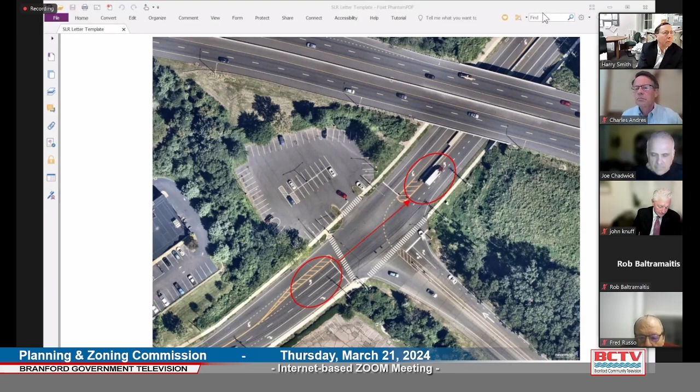I see that the applicant has taken in their presentation tonight one of the comments they had, which was really a more thorough discussion on internal pedestrian, bike, and vehicular circulation on site. I see they have a graphic that highlighted that. I think that's a good start. The town has to review that, and I'll review that with the town as well.

And how people get to Walgreens, I think they made some improvements in connections to show that as well. But I think that should be part of the traffic study, the discussion, the graphic. And if anything else, they need to fine tune that to address the comments. I don't think it should be silent on that type of issue.

The other thing tied to that is you're going to have a residential building. It is likely you're going to have kids. They may want to bike to Starbucks, bike to Walgreens, or walk. They may get friends from outside the community that come to visit them, and they're going to want to hang out there. It's kind of a natural thing. Just make certain you show how that will be accommodated.

The bike racks, as mentioned earlier, Mr. Smith. Just make certain that the circulation is safe, especially considering that people are going to want to walk or go to these other sites. And that's part of what a mixed-use project is.

The other thing is the crash data. I noticed that the crash data did not include the year 2023. I would question the applicant, they don't have to address it tonight, but I was hoping that there was more recent crash data available. They could update the traffic study to include the year 2023, or whatever is available for that year.

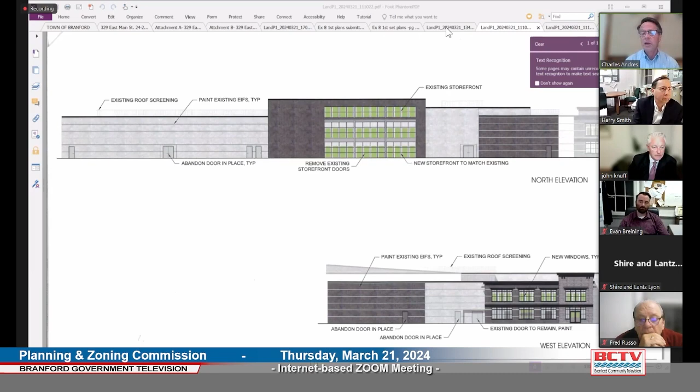Thank you, Harry. Do any other commission members or staff have any comments we'd like to make to the applicant before we continue this matter to another meeting? Okay, I don't see anyone.

Then the next question is, when do we want to continue this to? Do we want to make it two weeks, or a month - the first or second meeting? What do you think? As I said, Mr. Chairman, I don't want to give up the opportunity to come back to you in two weeks. I think we can keep the pedal to the floor, and I understand we're going to be submitting a lot of information.

Back to Harry that he will have to pour through, and then offer his comments again to all of you. Maybe there's a possibility, but the worst case scenario is let's plan on being back before you in two weeks. And if we don't feel we're ready, or if we feel it would be wasting the commission's time to do this iteratively, we can make that decision a day or two before the meeting, and we'll just continue the hearing. I'll be here in two weeks. We'll say we're going to continue until your next meeting, and that will be that. But I don't want to automatically assume that we can't make that.

Okay, that's fine. Harry, does that sound okay? That sounds reasonable, I understand it's sort of in flux and in process, so that makes sense. Okay, and by the way, in terms of Harry's last comment, we can dim those lights inside.

So there's lots of things we can do, but I think we should really consider eliminating at least the one on the cinema facade, the entrance facade. But that would be my personal comment. We'll see what the commissioners' take is. But thank you, all right, thanks everyone then.